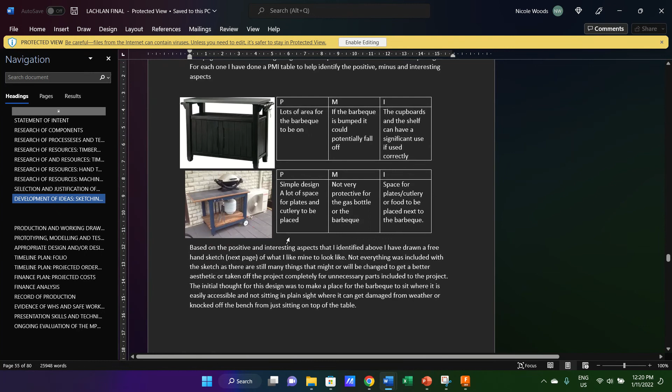This, so in Lachlan's folio that you have. Development of ideas, control click. Okay, you can see, and you can be doing this as well, you can see he's gone through and done his existing ideas and a PMI for each. Then an initial sketch, part numbers, dimensions, keeps going, talks about different joinery, PMIs for each, or just PMs, positive, minus, some interesting things.

Still more sketching, design options for handles. For those that need to create templates, you can put all this in here. Have a good read through it. He did this section really well.

Okay, so this is what we're doing. Production and working drawings. So this is the orthogonal, where it shows your front, your top, your side view, with some overall dimensions on it. And you'll see all the dotted lines is hidden joinery. So from the front, you don't just see the outlines of the doors and the cabinetry, you actually see all the hidden joinery in there as well.

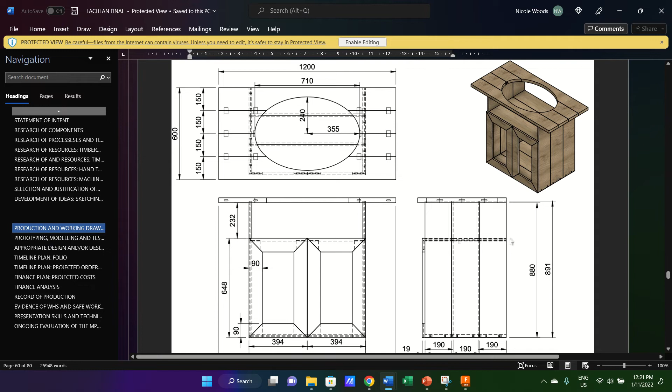Same from the side view, you can see the shelf going through there, you can see his joinery in his doors there, you can see the joinery in the tabletop, but not every single tiny thing is dimensioned, just like overall width, thickness, height, not positioning of joints.

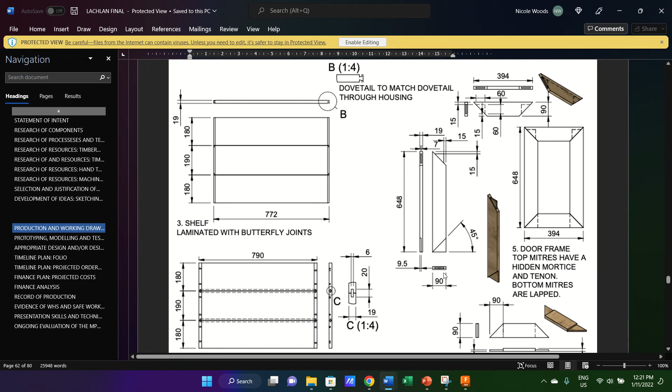For every piece of timber then, it's broken up. We did one here for certain panels, and then every single part. So like there's the side of the door, there's the edge of the door, the top of the door. We showed the whole door. We put some orthogonals in there if we thought it would make sense for him when he was making it.

The joinery we can blow up to show what that little section here is. So see, it circles it there and puts C, and then C1 to 4, it just blows that joinery up to that scale. Okay, so, and you can see here the shelf. The shelf slid in, but it had a dovetail on the end, so we showed that as well.

So how do we do this? In Fusion, you can each go to your drawing. Remember, you need to be in St Cath's. So when you first open up Fusion, go to the 9 dots. You should have a drop arrow here. Click on the one that says St Cath's. Then you should have a folder with your name on it, with your drawing in it that you've been working on. So Ryan, I've got yours open here for the demo.

And you need to go File, New Drawing, From Design. Click. Now, I've got all my folders shut here, and it talks about bodies and sketches. You might just want to turn sketches off if there's a whole heap of extra things on your page.

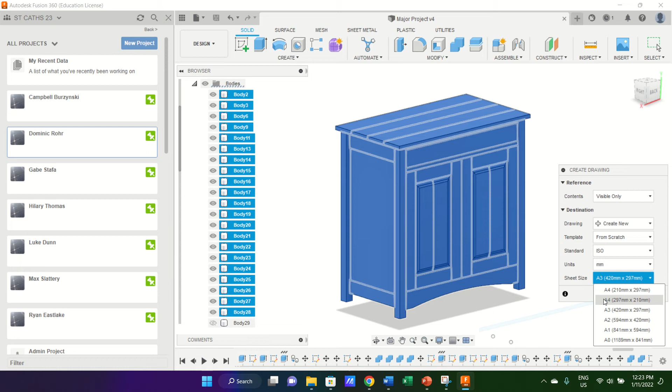Now, contents visible only. So, visible only refers to the bodies being turned off and on. So this one's turned off because it might have just been something that I used to mirror or copy. Same for you. So I turned that one off because I didn't want to see it in the next set of drawings. So if there's anything on your page you don't want to see, click on the eye for that body, turn it off. So visible only, destination, I want to create a new page from scratch, ISO standards, unit millimeters, sheet size, drop down and click the second A4, and that is a landscape A4 page.

Click OK. It's thinking, it opens up a new page because you told it to, and it says place base view, so just click. Okay, it opens up with this drawing view with these settings. So orientation, it's the front view. And you can click through and choose different ones.

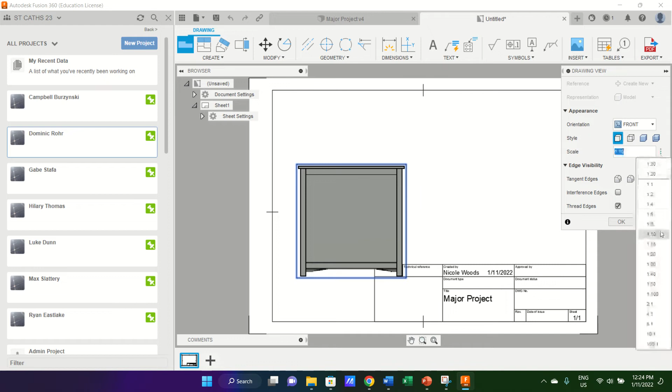Scale you can change to make it appear bigger on the page. 1 to 10 is probably a bit big, might go 1 to 16. There we go. And style, I'm going to show visible and hidden edges. Click OK, and that should do all that.

Now I'm just going to click on the title block here and click delete. You don't need to have that. And on the border, I don't need to have that. Now when I click back on it, I can just click and drag and move it to a place on the page, about there. I'm leaving some space around it for dimensions.

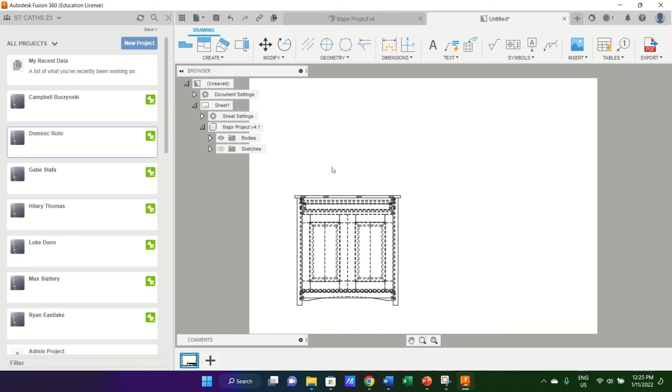I might try to get that a bit bigger. So if you double click on it, the drawing view opens up again. Yeah, we'll see how 1 to 10 goes. Oops, escape if that happens. Click, drag, place. Okay, now to get the top view and the side views to pop up, have it selected,

and up the top here you've got projected view. Now that's actually showing it from the base view, I don't know why. So if you drag it down here, it'll show it from the top view. So just click to place and drag it out here to show the right view, even though it's on the left - I don't know why, just do it. Click to place, and I want an ISO view.

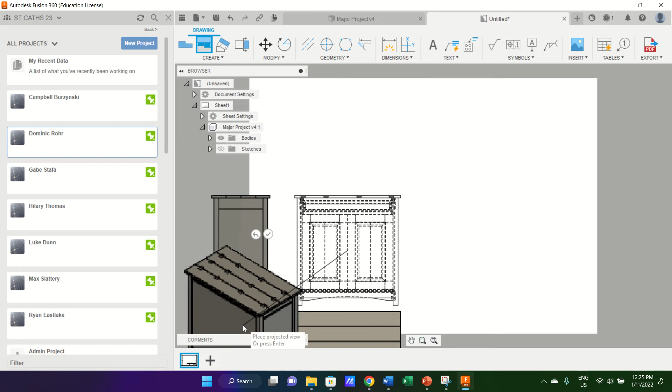Down here, escape. Right. So now this one I can just click and drag up. Yep, fits pretty good. Click and drag across.

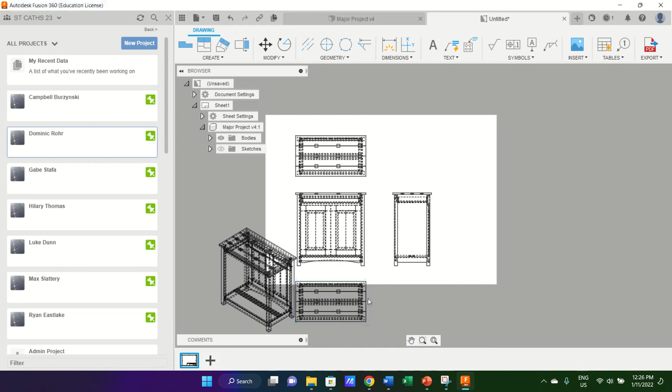Double click. Close. Delete - yeah, I clicked delete on the keyboard. That was fine. And that one I'm just going to put over there. I'm just going to click and move things around. You'll see they line up - they're meant to, that's the drawing standard.

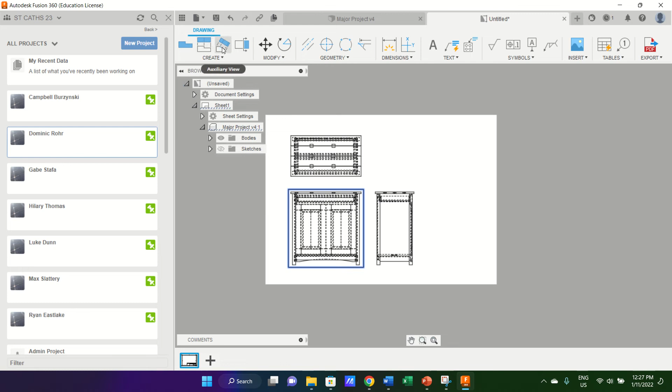There we go. And this one, okay, that's the cabinet, but it's back to front. Interesting, I might just delete that. Close. Delete. Projected view. It's only showing it from the back. Interesting.

That's okay, I think I know a way around that. Anyway, in terms of dimensioning,

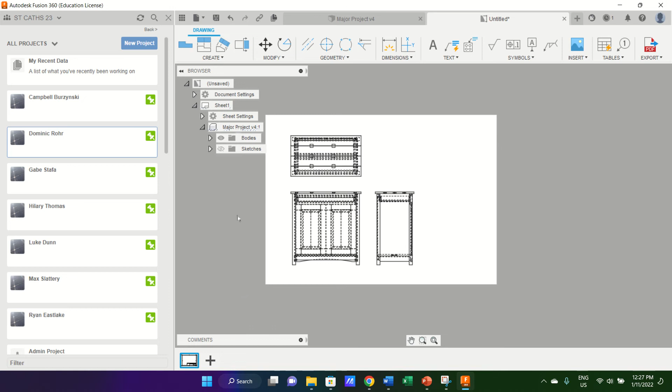you just click up here and it tells you select edge or specify point on an object. So I just want to know how high my overall project is. So click - that's not click and drag, I've just clicked. And I just go up and pick the very top point in my drawing. Click, bring it out nice and straight. See if I came on an angle it changed - it's because it's measuring it on an angle. I don't want it measured on an angle, I need it nice and straight.

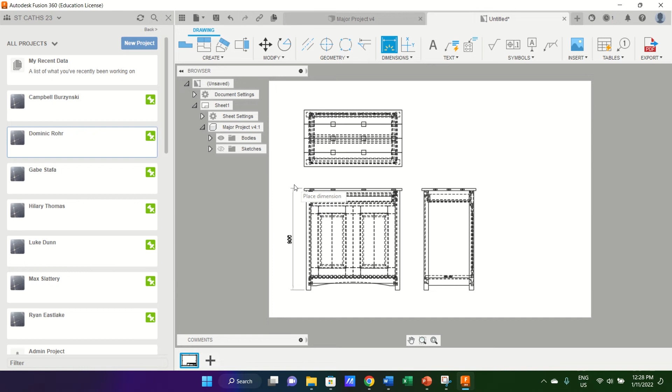900, and you come out and you click to place the dimension. So then I can zoom in and go, all right, well now I want to know from here to here. Okay, you can zoom out and click to place, and I know my tabletop's 19 mil. That's enough to now use a little bit of maths and work out the length of the leg. So if there's enough dimensions on the page to work something out, you don't have to put the next dimension in there, it just clogs up the page.

Okay, I might want to know the width of the whole thing, so I can do that in the top view. And I might want to know the distance between the legs. And again, from those two numbers, there's enough to work out how far in the leg is set, so I don't need to put that tiny dimension in there.

I might want to measure the width of the legs, 42, and same over here. I want it to line up with that one. Done. And again, that front panel now, it's enough information there - I could go 860 minus 42, minus 42 tells me how long that one is, plus the joinery that's in there.

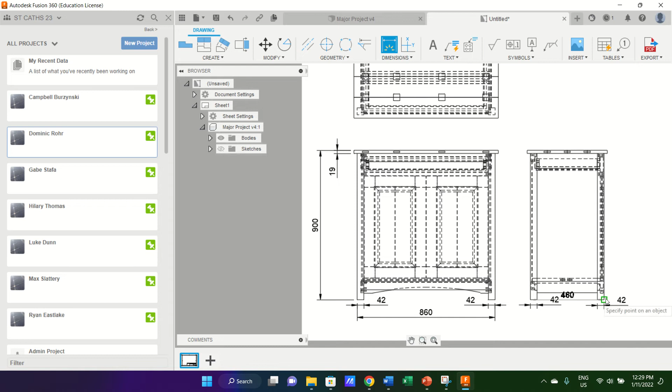Okay, just overall dimensions from the side. Click, click, click. Overall. Click. Okay.

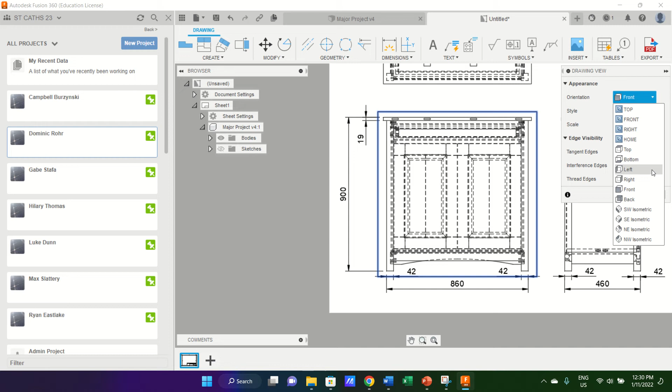What else might you need to show on this front view? You might want to show your doors. Now, this shouldn't all be dotted, but it's showing it from the back view, which is weird, so I might just click on back - that's better. Close, that was weird.

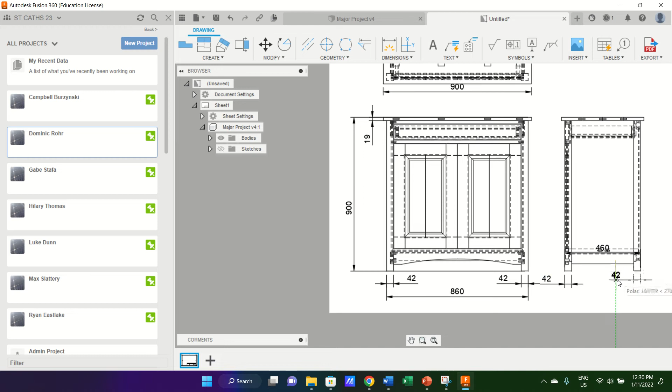Now you'll notice I've kept the dimensions on the outside of the drawing. That's the Australian standard. Now the standard it refers to is the AS 1100. That's in the syllabus - it's the only question they'll ask you in an exam about drawing standards is which ones we follow, it's the AS 1100.

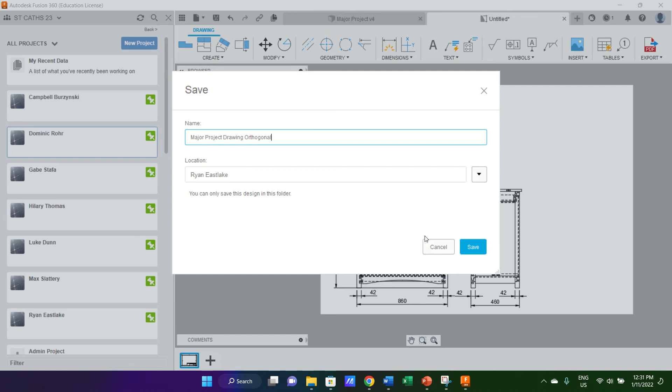Okay. And we'll see if I can get the isometric drawing in there. So it says untitled at the moment, asterisk, so just click save. It's going to say save it as what and where - Major project drawing orthogonal. Save, make sure it's in your folder.

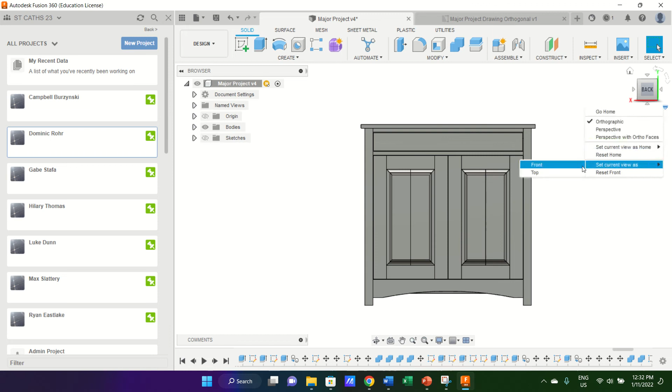And I can click back to the previous drawing and hopefully that might have messed up our drawing, we'll see.

That's better. Okay, let's see what happens. File, new drawing from design.

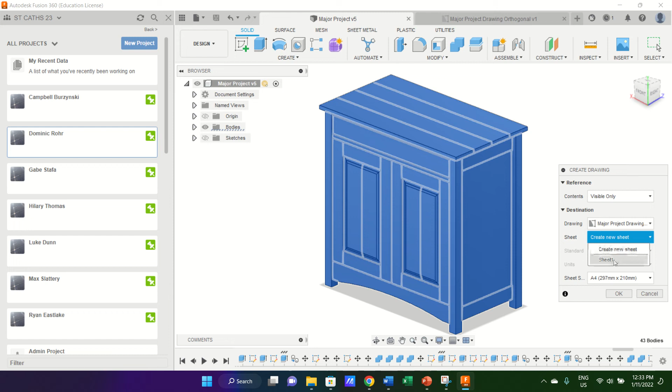Visible only, yes. Drawing, no, it's not create new now. So I should be able to go to the drop menu and major project drawing orthogonal, which we just saved. Create a new sheet, nope, the current sheet, sheet 1. Everything else is set because it's already in the sheet 1 settings.

Click OK. Yeah, here we go, version, okay. That's because I changed that view.

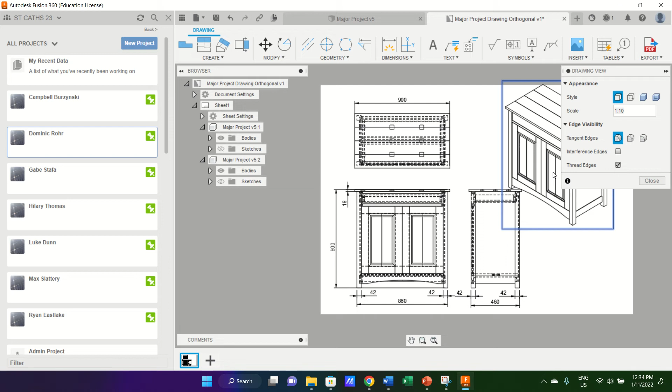That's the one. And I'll just change the scale of that, 1 to 10. And I'll just change him to rendered.

There we go. Now that's enough for that drawing. I'll just save it again.

And you'll want to print this off to have in the workshop with you rather than trying to remember things, or having your laptop in there so it's dusty. You can export this as a PDF.

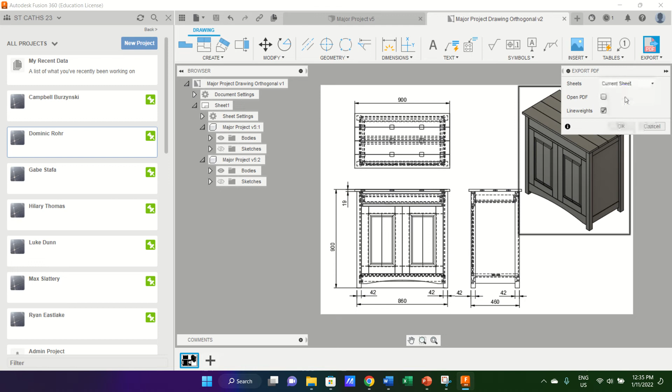Sheets, so down here it's like PowerPoint kind of thing. It creates extra sheets, so it's just sheet 1 or current sheet. Open PDF if you want to view it. Click OK, it'll ask where do you want to save it.

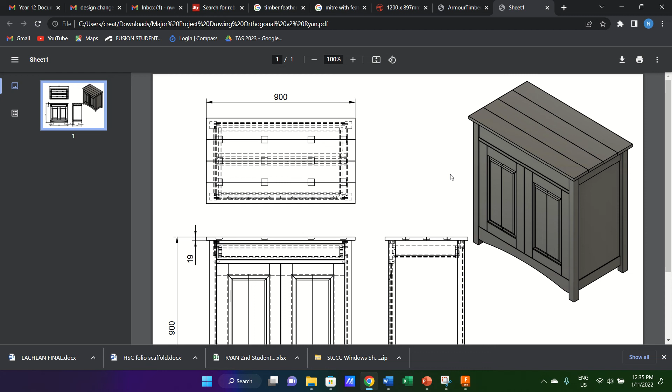And it's saved. And there's my preview online. Okay, so you can print that. I can just zoom out for now, so it's all fitting on the screen.

And what you can do now is take a screenshot. So this is with Snippet. If you're on a Mac, I think it's Command-Shift-4. If it's wrong, just Google it. Okay, Control-C, and then in your folio,

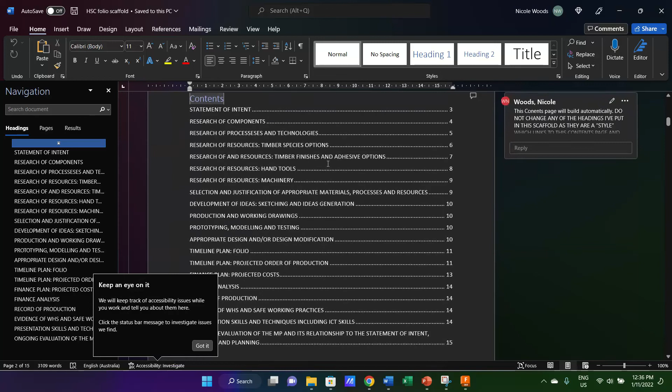in production and working drawings, Control-Click. Oops. Okay, you can enter this section onto a new page.

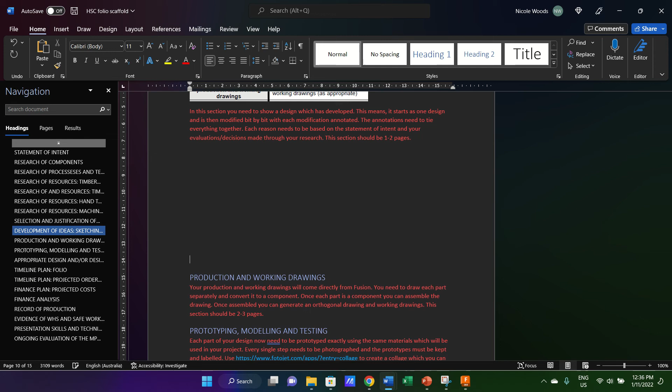Now you might have 1 or 2 pages here of your sketches and notes, explanations like Lachlan did. Then when you need to paste this section in,

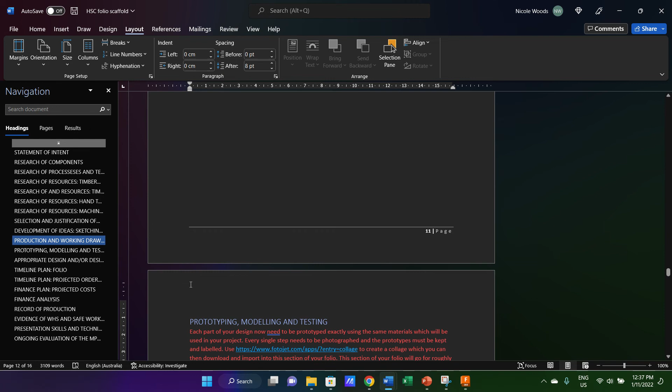all right, we're going to come up to, I believe it's layout, breaks, continuous. Okay, so it means you can flip the page now, orientation, landscape, bang, right click, paste, there's your drawing.

Okay, text wrapping through, and you'll be able to move that up, make it as big as you can.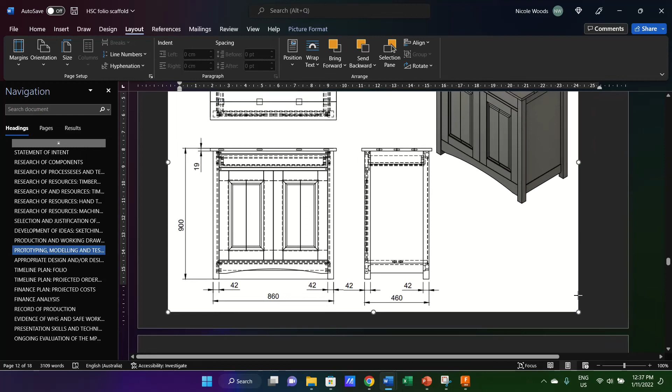You can change the margin. You can make them a bit bigger. Okay, so that's that page done. When you click onto the next page, oopsies.

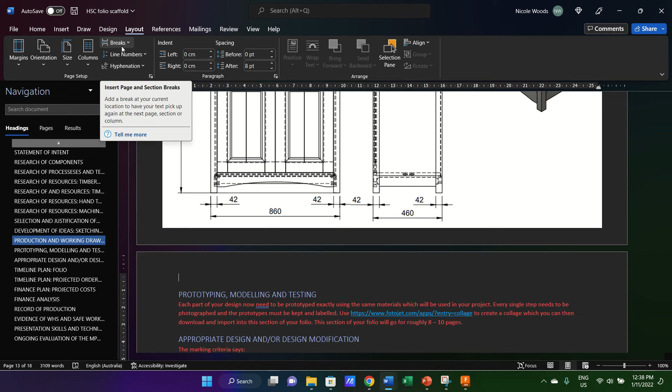Okay, if you want to flip this page back, you can. You just go breaks, continuous, and then flip it back. I'll just leave it landscape for now because we're not finished.

So, back to this drawing here, we're going to start doing our working drawings. File, New Drawing, from Design. It says visible only, and you just want it to be selected once.

Now, you can select by clicking on them, which is tricky sometimes with the lag in Fusion if it's slow for you, or you can select it through bodies.

This is working very strangely. I'll just go to right. Home.

Okay, so see when I click on that part, in the list there should be a line under it, body 33. So 33, 3. I'll just make a list here for myself on a bit of paper. 33, 3, 2, and 13.

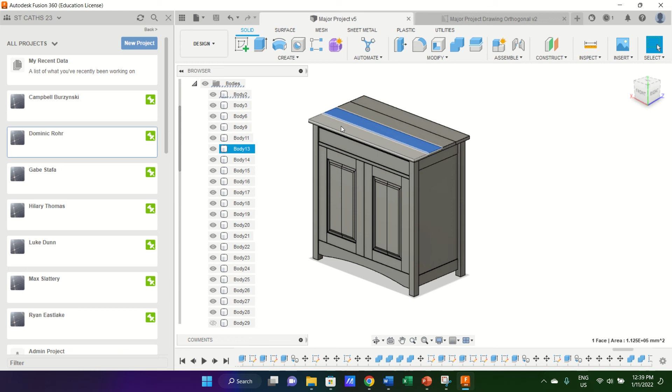Right. Might just be because I'm filming. From design, select, and we said 33. Oh boy. Yep, something's going wrong with the video.

See, it should be highlighting just that part in blue as I click on them.

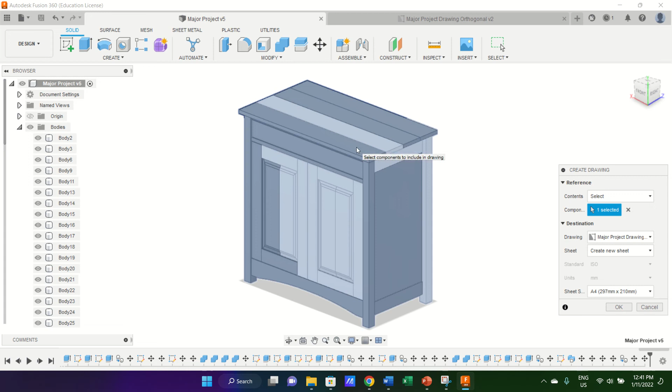And then when it does, you come down here and you go Major Project Drawing Orthogonal, and this time you click on Create New Sheet, select A4, and you'd click OK, and it would take the sections across that you'd selected, which is very frustrating.

Maybe if I do that. Is it cancelled for now? So it's letting me select it there, but not once I'm in the menu.

Let me turn off everything else, which you won't have to do, you should just be able to select it. So it was 3, 2, 13,

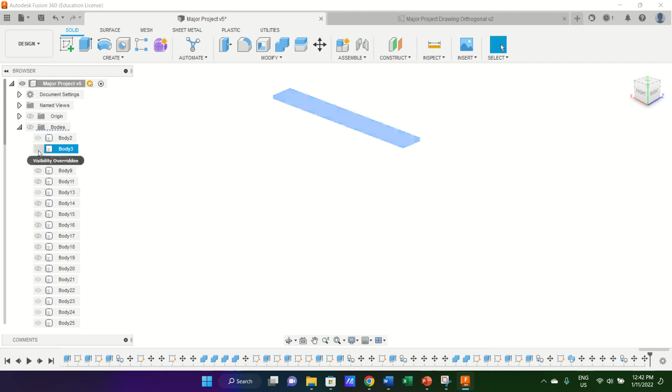and 33. You know what will be quicker? Turning them all off and then turning those ones on. Can't do that. Okay, 2, 3, 13, 33. That's the one I want.

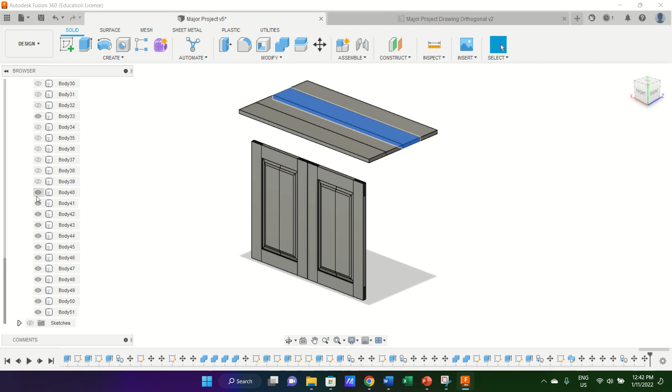Right. See if this works this time. File, new drawing, from design. Oh boy.

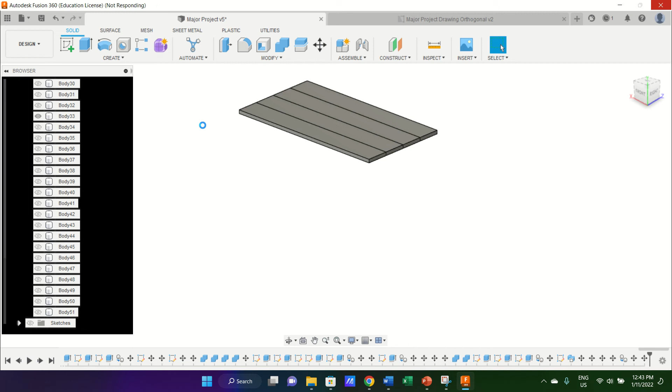Alright, visible only. It's working so far. I've got to create my drawing, select the existing drawing we've made, new sheet, select A4, click OK.

Okay, so down the bottom here, that's sheet 1. It made the new sheet for us. We can place the base view and project to the top view. From here, I can project a view from that one to show the side view.

Now, I don't like how small it is, so I'm going to make it 1 to 10. Show hidden detail, because the hidden detail is the joinery.

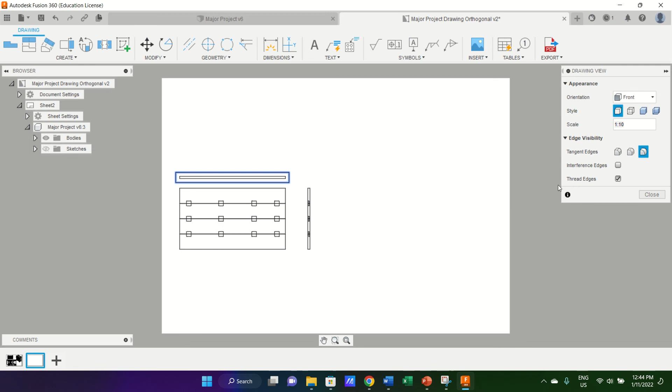1 to 10. Close. All right, now just going to zoom in on this at the moment. So now in the side here, it's showing that I've put these boards together

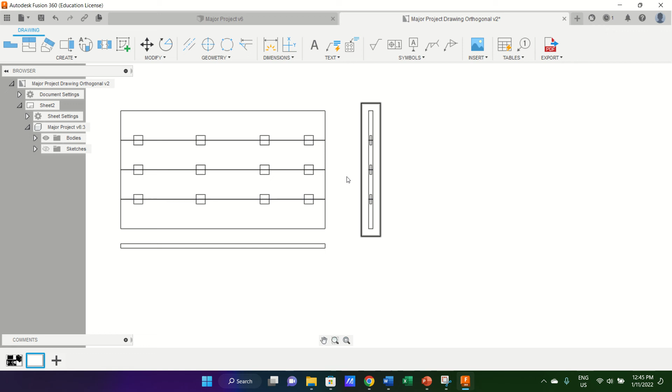with a feather. And they run the full length. Sorry, that's not true, it's not a feather. They're dominoes. Okay, and now we can dimension it.

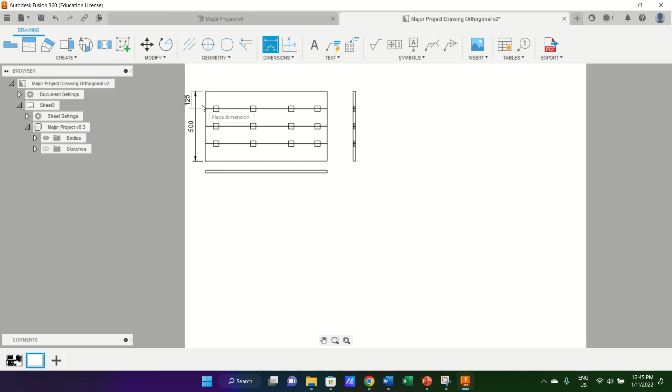So dimension the whole thing, needs to nab at 900 by 500. And each board is 125. 125. 125. I'm just doing this quickly. Make sure you get yours lined up as best you can.

125. Now, if you looked at your cutting list, you might see that the timber for this part was ordered at 140 wide, so you need to rip it down to 125. You'll have that, what is it, 15 mil left over. Hold on to your scraps, okay? You might need them later on for things like feathers.

Okay, the length. And the thickness here. Okay, there's enough dimensions on there now to make that whole panel.

The dominoes, doesn't matter where they go? No. Okay, you don't need to measure how far in this one's drawn and how far in that one's drawn, just try and keep it symmetrical. So this domino you might put at 60 mil in from the edge, same as the next ones, and then just even these two out. Okay, you might have just been drawing them in quick. I might have been helping out and drawing them in quick as well.

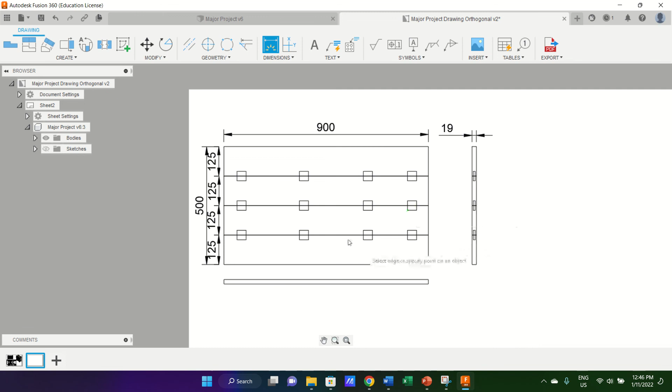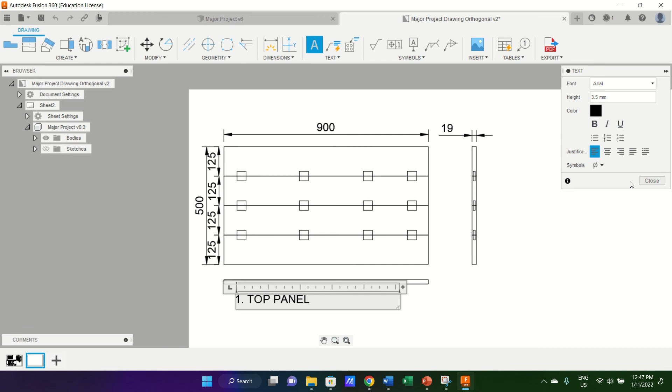Now labeling it. So I hit the text option and just drew a box where I wanted to type and give it the number that links to your finance table in your drawing. So this should be part 1 and same name as it is in the top. I can't remember what it is, but it's, yeah, top panel. Whatever you called it in your finance table. Okay, you can adjust the text and the height here and click close. Locked in. Great. It's got an asterisk that's unsaved, so hit save.

Okay, and you want to go and get the next thing you need to make. So jump back into this drawing. This is the frustrating thing of the video.

You can see it's kind of ghosting where when I hover over at the body on the list where it is in the drawing. So I'm up to 25, I'll scroll. And I'm looking for the back leg that connects to this right hand panel and the panel itself. I want to see that one and the panel that goes in there.

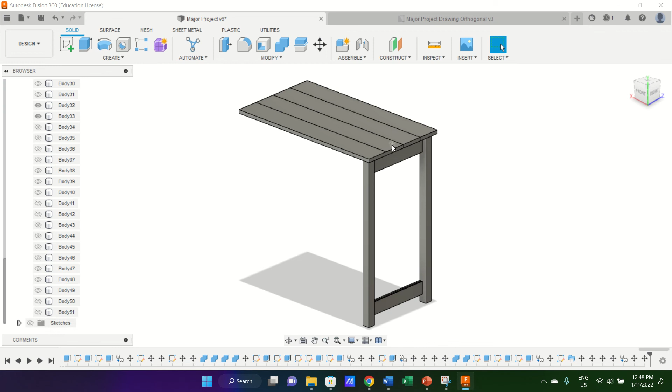To 39. Again, guys, you shouldn't have to do this. You should be able to click on it. Couldn't find it. Let's turn off 33.

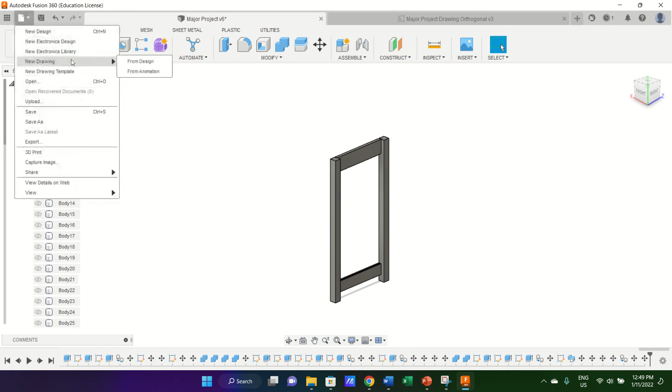Oh look, for the sake of the video, it doesn't matter. So, file, new drawing, from design, visible only. It's not new, it's this one. It's not a new sheet. I can fit it on sheet 2. Click OK.

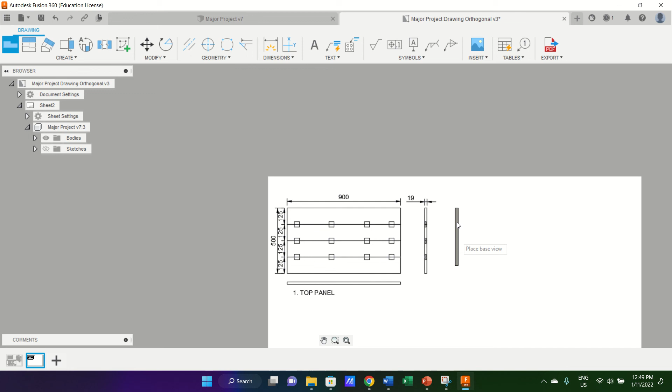It's thinking, it's a little slow. Here we go. Okay, there we go. 1 to 20. I think we went 1 to 10. And we want to show hidden view and click OK.

Now I can create a parent view, projected view, sorry, from there. And what you can see here is the front leg, the bottom side, the top side. There's a panel that slots in here and runs up to this dotted line and this bottom line.

And the dowel joints where I've got those. Okay, you can do more projected views if you need them.

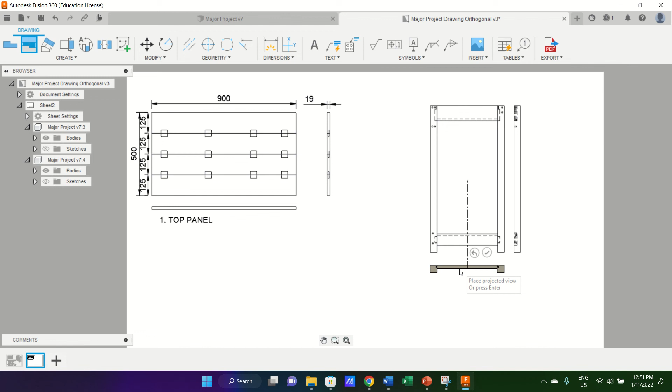Okay, and that shows the dowel going into the leg that way, and it shows this bit of timber with the mortise and tenon on it. Okay, and you go around and you dimension each part.

Now, if you're going, oh crap, I can't actually see what that piece looks like, well, jump back into your drawing and go, okay, well now I just want to see that part. So I might just deselect everything else, so it's just body 9 selected.

You can zoom right in, you can see what it looks like. It's actually a haunched mortise and tenon. Okay.

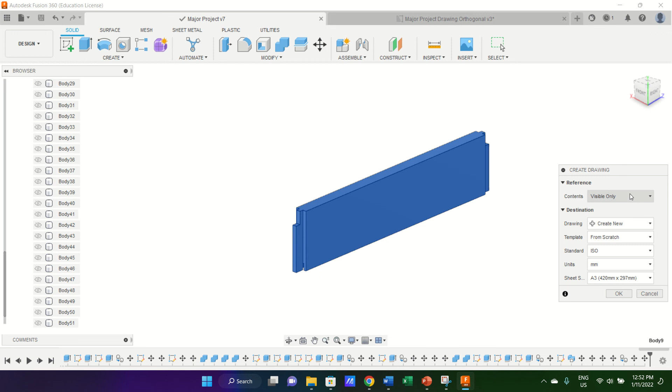File, new drawing, from design, visible only, sheet 2, okay, thinking.

Here he is, 1 to 10. Show the detail. Click OK. I can take a projected view out here.

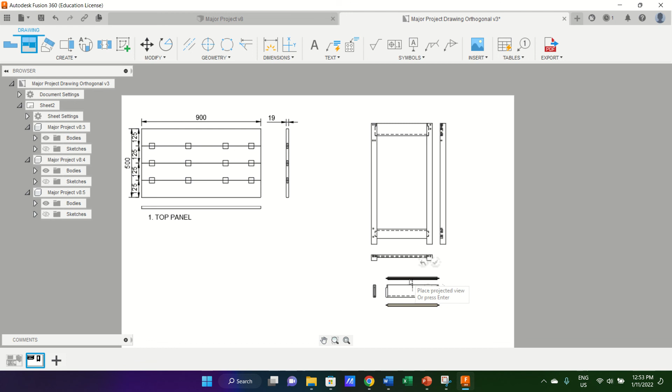Okay, and that's showing you that piece. You may even want that projected view and that projected view. And you can double click and say you just want to see it rendered, and that might help you see it.

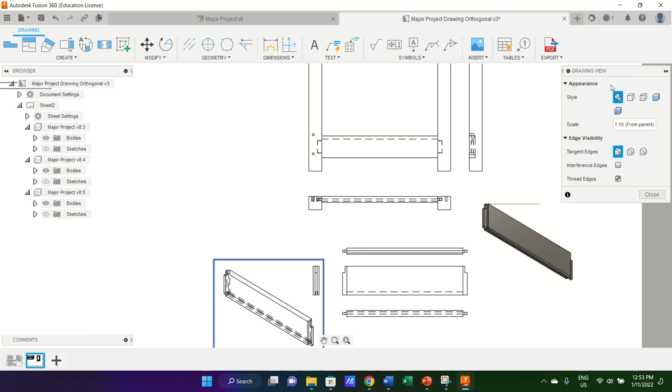Double click to open up the drawing view, click close. Okay, and that should be enough information to make that whole side panel. Don't forget to dimension it. Alright, well,

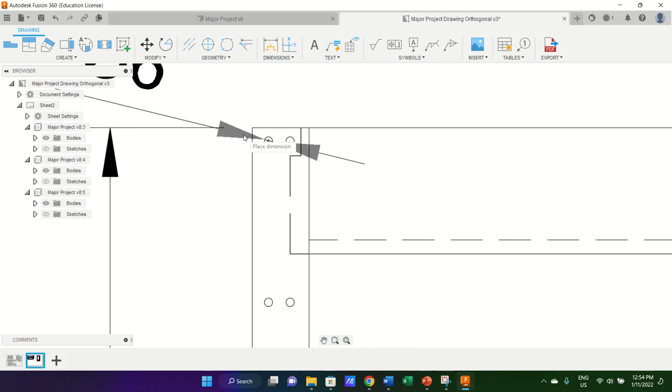There's the leg. You can dimension in, you can click on that. If you dimension in a circle, dimensions, diameter, click, click, and there you go. It tells you it's diameter 6.

Okay, change it back to normal dimension. From there to there is 12 mil. Okay, so you can work around putting around as much detail as you need to.

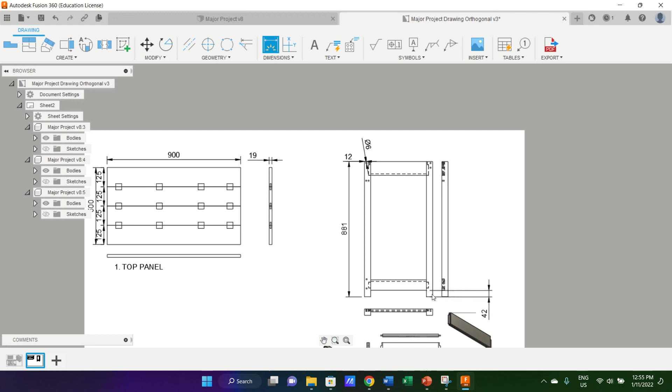You might want that one there. And you might want to dimension this one. So from the very end to the very end, that bit of timber is 404 mil.

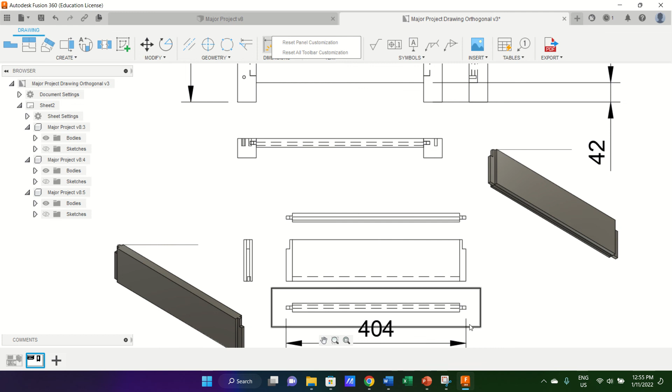From there to there, come out straight by 90. There to there by 19. Put as many dimensions on as you need to be able to go and make it. Okay, the tenon is 14.

The drop down here on the haunch. Oopsies. 20.

Right, now things are starting to get messy, so you can still just turn off the dimension tool by hitting escape, and you can move things down. Okay, keeping it easy to read.

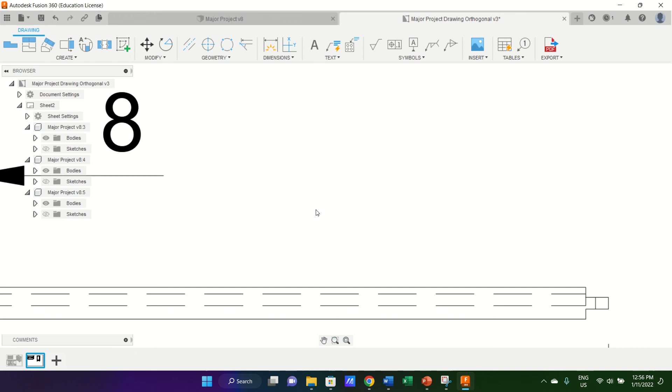So make sure you import enough pieces to fully dimension, so you know how to make every single piece, you know every dimension of every single piece. So I've done this in panels. I've shown you how to pull in individual pieces. You need to do that enough so that every single part of your drawing is on here.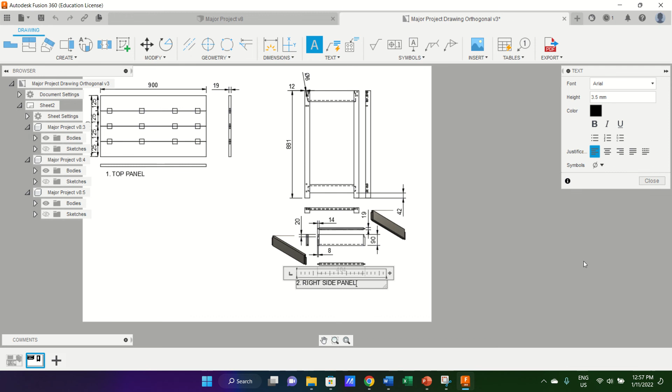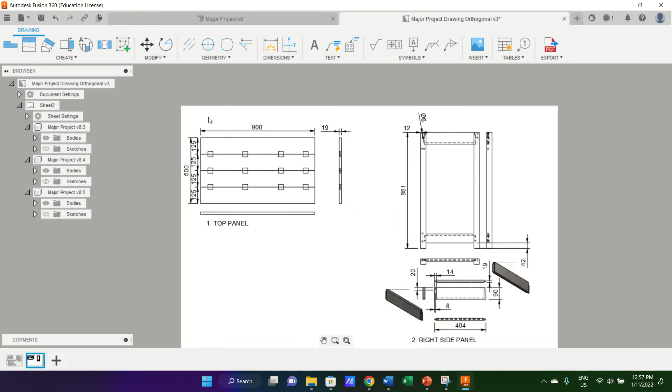And this might have been part 2, the right side panel. Close locks it in. Okay. And take extreme note of where things line up. Don't get in the workshop and put it somewhere else. So don't just decide, oh, I'm going to put this in the center, because this might relate to another part, like a drawer rail that's supposed to secure along to it. Make it exactly as it is in your drawing, because there will be flow-on effects if you start changing things.

Okay, now if you run out of room on a piece, on your sheet, okay, save. You just come back into here, and I might decide the next part is going to be, turn them all back on individually now.

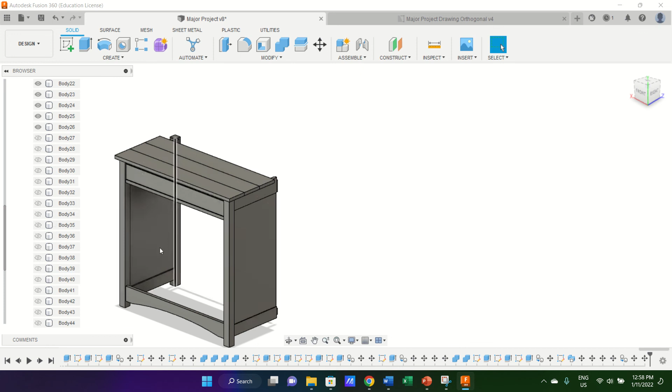Oh, look, let's, as an example, file, new drawing, from design, visible only, still that drawing, create a new sheet. It'll give me a new sheet, sheet 3. Okay, so sheet 1, sheet 2, it's taken its time. It's going to open up another sheet for us.

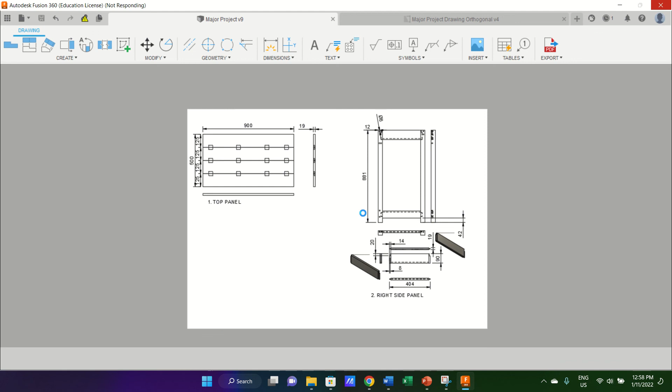Okay, there we go. So that was whatever part I was doing next. I can do all my projected views. I can label it, dimension it, save. Now, you can then export these all as your PDF.

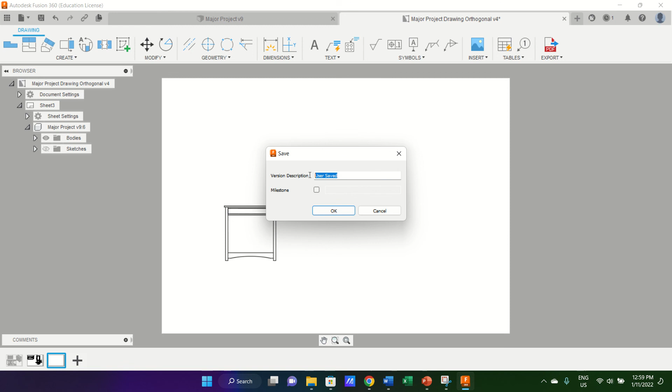It's okay. This one wasn't saved. Save. Save. Export, all sheets, open when it's done.

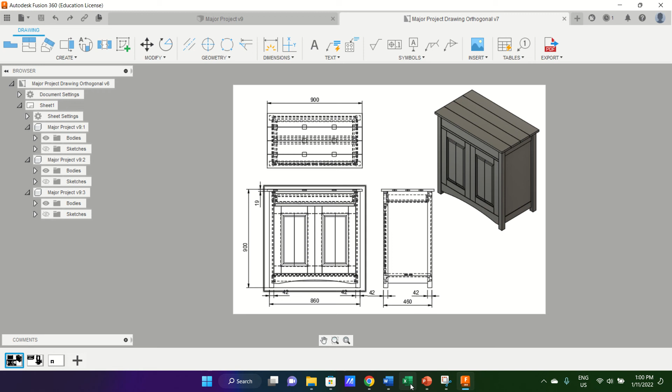Where's it saving it to? That'll do. Okay, so we already took a screenshot of that. Then we can take a screenshot of this one. I'll zoom out so the whole thing's on my screen.

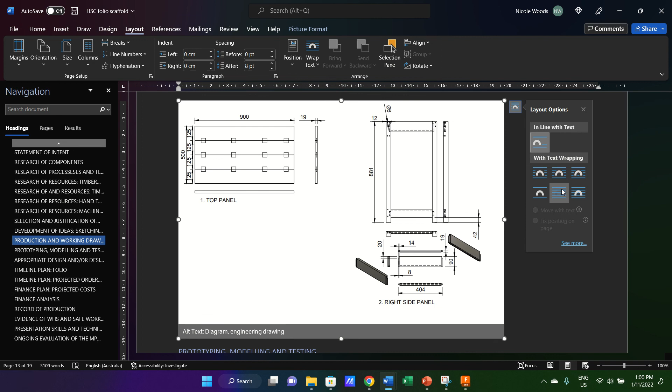Screenshot, new. Copy. Okay, straight after your orthogonal, paste, text wrapping through, make it bigger, fill the whole page.

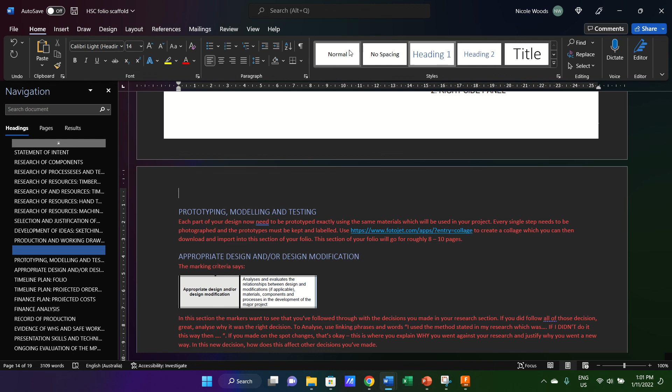Okay, so you'll have however many pages of drawings as you need. Okay, so see how this has still got the heading format on it? If that ever happens, you can come to Home and click Normal. It's back to normal formatting.

And you want to flip the next page back. So insert, layout, breaks, continuous, orientation, portrait. Okay, and that is how you get your drawings into your folio.

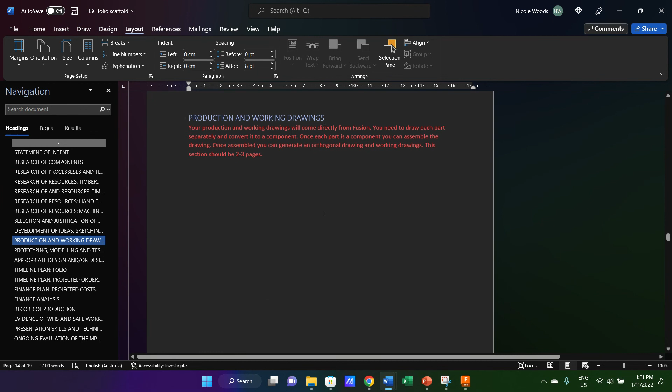Okay, so you should have all your hand sketchings here with notes, orthogonal drawing dimensioned, and then your set of working drawings, either panel by panel, part by part, or a combination of both, whatever you need to be able to go into the workshop and make it.